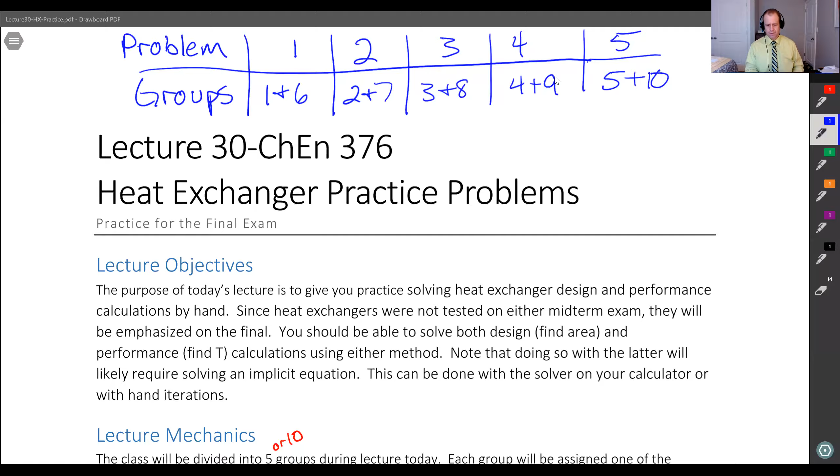George, I think you invited me into your group. Do you have a question? Oh yeah, I'd invited you when we weren't sure. Or is group 5 doing problem 5? Group 5 is doing problem 5, yes. Do you see my screen still? No. Okay. So I will broadcast a message to everyone, but you're doing 5. Yeah, problem 5. Okay, perfect.

I can't hear you on my end. I don't know if everyone can hear you.

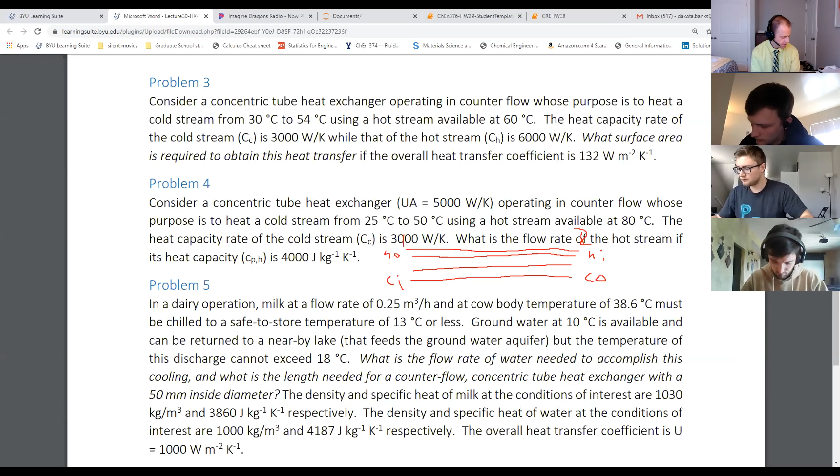So what we did is we solved for the total heat using the change in temperature. Yeah, m dot Cp delta T, good. And then we divided by UA and then used a solver to get the outlet temperature. Okay, what'd you get for the outlet temperature? That's what we think is suspect. We got 31. Not Kelvin, Celsius. 31 Celsius, yeah. Okay. I think you're okay then.

So I got 0.383, and we haven't talked amongst each other about why we have different answers. Okay, I'll let you guys talk through it then. I think you're okay up to your temperature, so that should be pretty easy to figure out.

Okay. All you smart people got an easy one. Yeah, seriously, it was dope. Okay, so I'm gonna go check on some other groups.

So Dakota, how did you get your 0.0006?

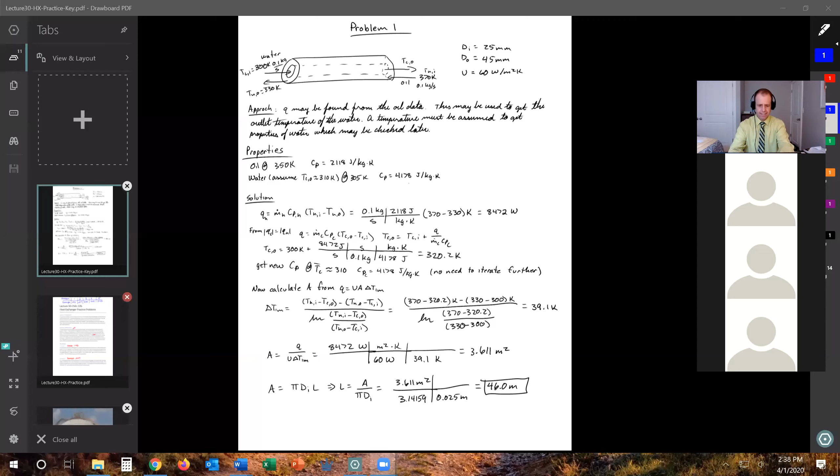Problem number 1. So let's just go over this. I want to talk through a couple things real quick. On this one, you know the inlet temperature of the cold and the 2 other temperatures. You also know both flow rates. And so you can get the other temperature fairly easily just using m dot cp delta T. That should almost always be kind of your first thing that you do on these problems, is just use the thermo equations to see if you can set all the temperatures.

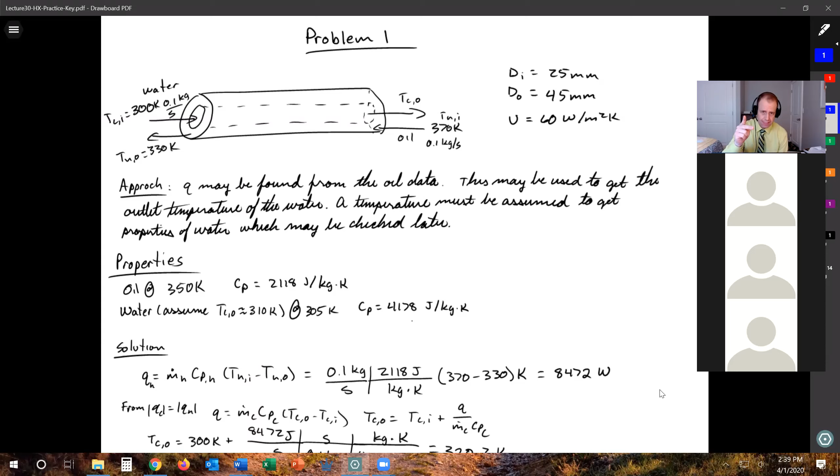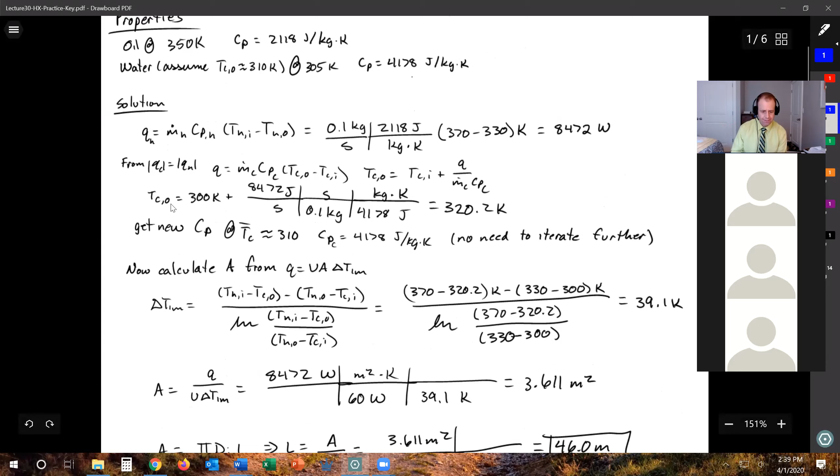That becomes problematic if you don't know a flow rate or if you don't know 2 of the temperatures, because then you've got to solve 2 equations, 2 unknowns. But the first thing you should do is use m dot cp delta T to get a new temperature. You see that I guessed something so that my T cold out was about 310. And I assumed water at 305, and the properties work out that you don't have to iterate much.

And on all these problems, if you haven't noticed, I don't make it so that you have to calculate h's. I've given you the U's, and I will do that. I will test whether you know U's, maybe on other problems, but I won't make you get a correlation on a hand-like problem. I would give you h's or something like that. At least that's how I think of it. That's how I've done it in the past.

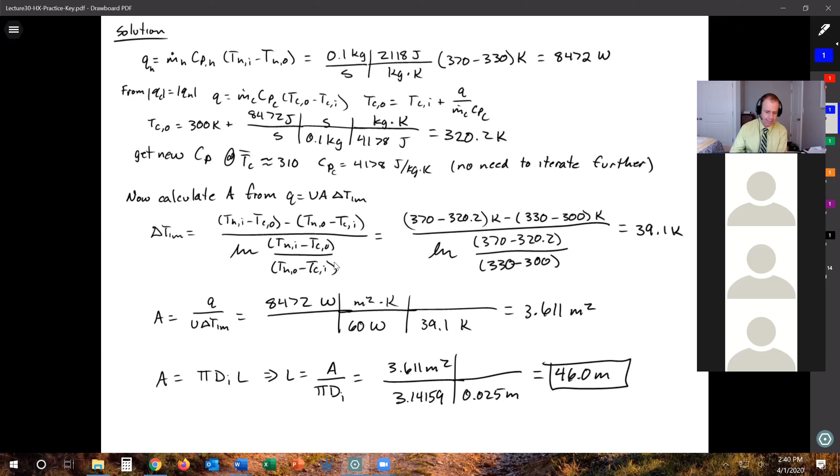But what makes these easy, right, is that you don't have to solve an h out or a U out. I give you those, and so area is separated out. There's no hard correlations that are dependent on L or the length. Where did you get the heat capacity of the oil? So I just looked in the back of the book. There's something called oil. It just says oil. And I just picked it up there. Okay. All the properties, if I give you a hand calculation like that, it's going to be in the back of the book.

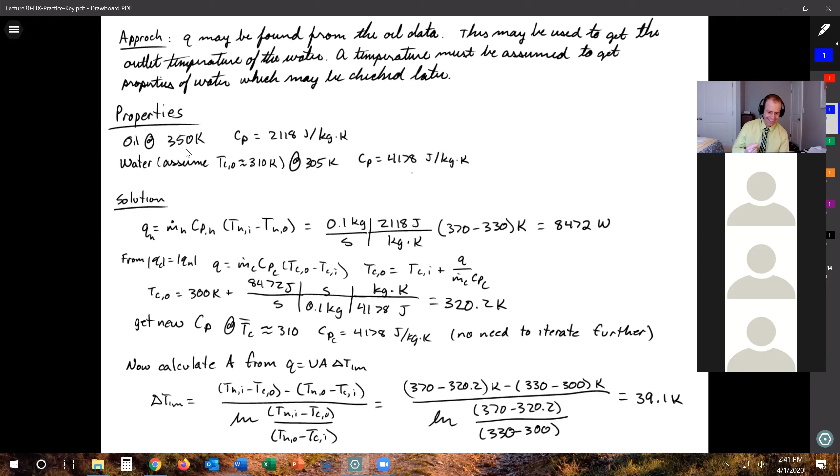I think there was something wrong with ours. Like, is that group 7? Yeah. We're pretty confident in group 2. Okay. Here's what we're going to do.

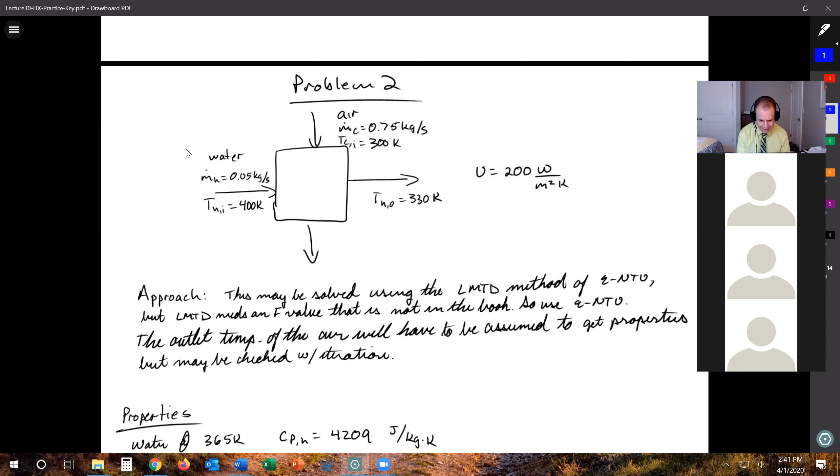So I give you inlet temperatures, and I also give you a U value. You don't have outlet temperatures here. Oh, you do have one outlet temperature, so you can get the other temperature fairly easily. So again, I kind of guess to get the heat capacities, I use Q equals m dot Cp delta T, and this is what I get for my other cold temperature. This one, I used epsilon NTU because to deal with delta T log mean and crossflow, you have to get an F value. The F values are not in your book, they're in the supplement of your book, so you could go get those. But it just seemed a little easier to do the epsilon NTU method.

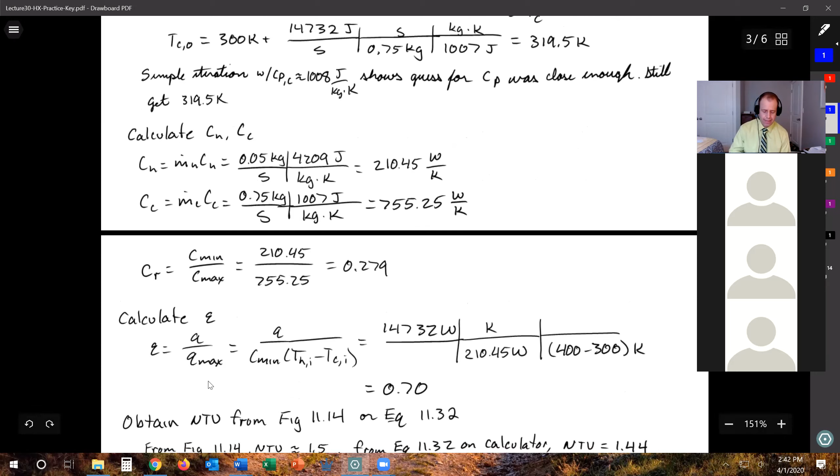And so you can calculate an epsilon because you know Q and Q max. I go then to figure 11.14, I get an epsilon of 0.7, use that to get an NTU of about 1.5. Or if you use the equation, you get 1.44, and you get about 1.5 or 1.6 meters squared. So I'll give that one to you. The point with this is if you have a complex geometry, the book has all of the charts in it already. I'm going to bring that up real quick in chapter 11.

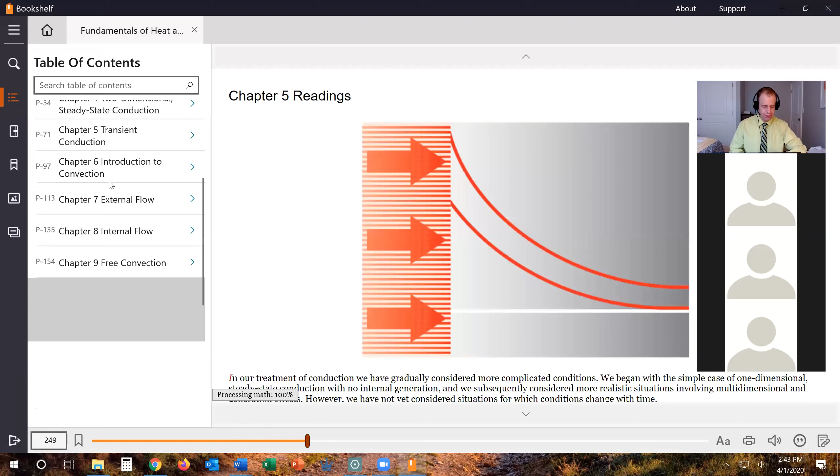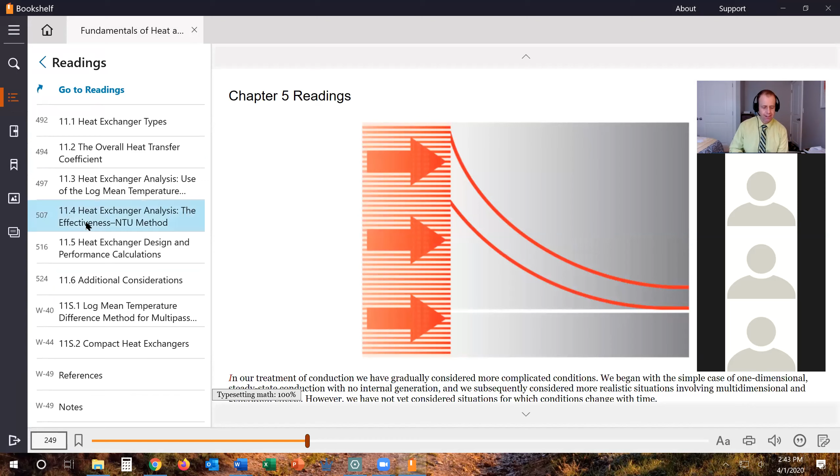You can use the equations, but if you're on a time crunch, like on a final exam, I'm going to be very liberal; I don't want you to have to iterate or do really complex equations like in tables 11.3 and 11.4. So let's just look here for a second in section 11.4, where it talks about the effectiveness NTU method. It's almost there.

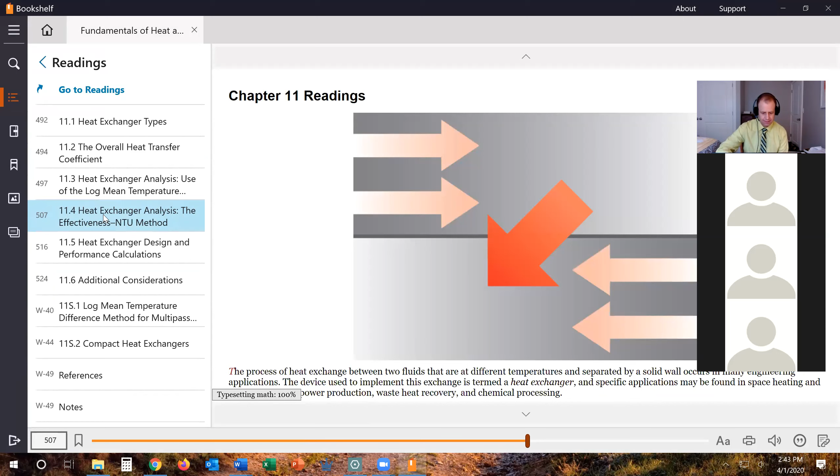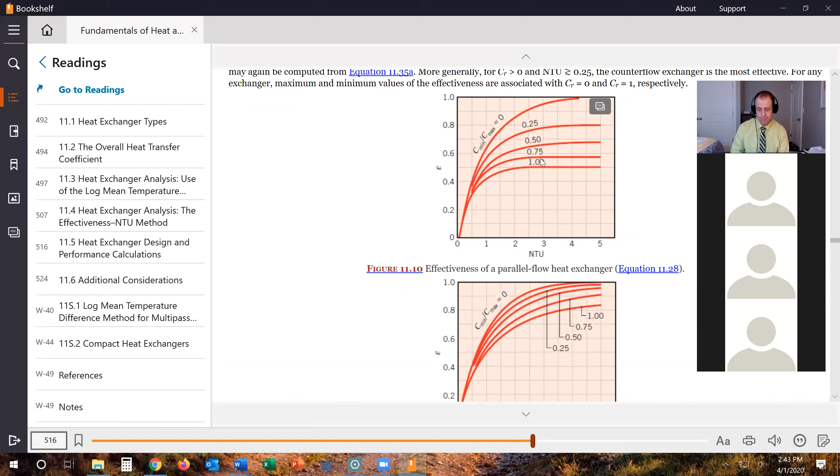There we go. So you can use these equations in table 11.3 and 11.4 to get epsilons or NTUs, but these same equations are in these tables right here. And in a time crunch situation, it would just be easier to pick off a table. So either you'll have an epsilon and a C min over C max, and you'll pick off an NTU, or you'll have an NTU and a C min over C max, and get an epsilon. And right here, you can see we have this cross flow, both streams unmixed. Figure 11.14. And so I just went to this chart, picked one off, and got it.

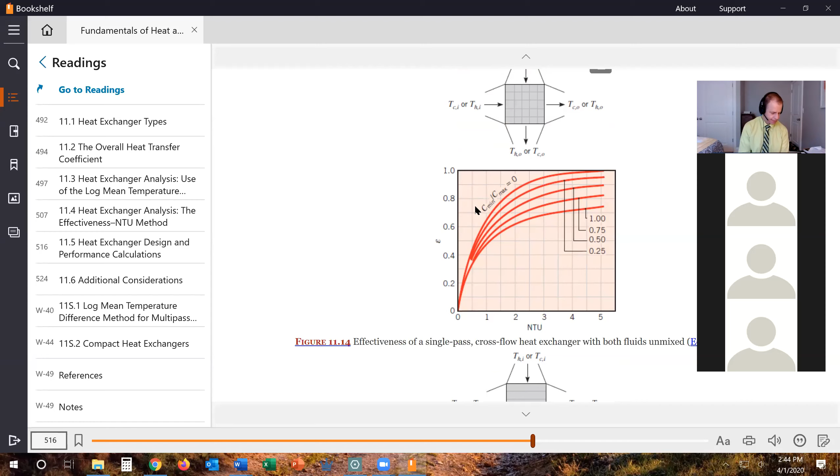But it's pretty easy to do the epsilon NTU method here because you don't really need to ever calculate the outlet temperature in this case. So I can estimate a C min and a C max, get the epsilon, go to the equation or go to the chart, get an NTU, and then solve for area. How did you guys do it? Did you use delta T log mean or did you use NTU? We used delta T log mean. Okay, so you can see that we're getting the same answers no matter what method you use.

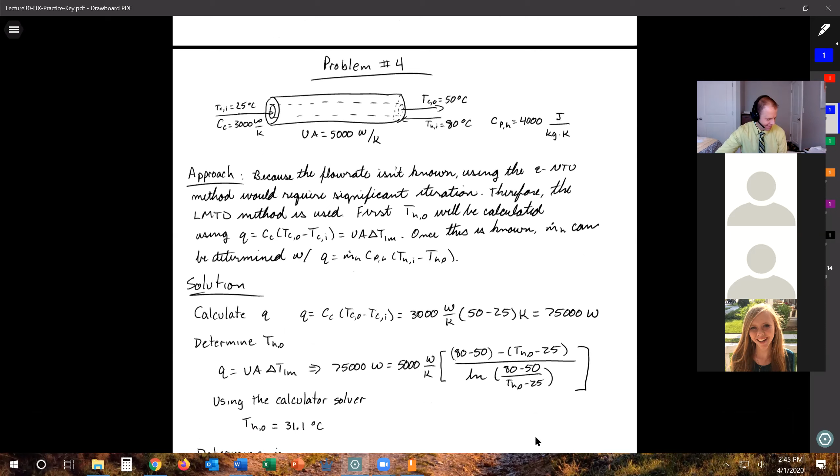Let's talk about this one for a second. I won't show you the answer just yet. Given 3 temperatures again, and you're given a UA in this case, and you need to calculate an M dot. M dot's one of the hardest things to calculate. If I was doing this on a homework, you'd have to do a huge F-solve block because almost everything's dependent on M dot. Now, it gets a little easier because I give you UA, so you don't have to use that M dot to get H's. But notice that anytime I give you UA, it gets a little easier.

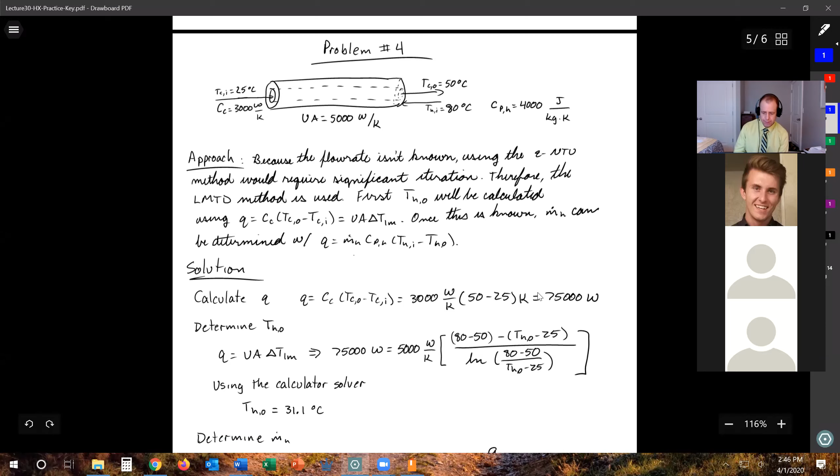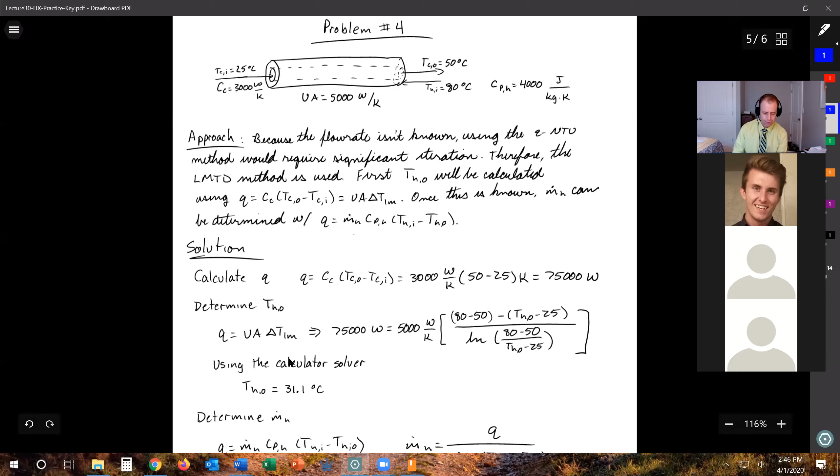So in this one, you can calculate Q using M dot Cp delta T. And then you could calculate an outlet temperature on the other side by using UA delta T log mean, or you could use Q's, or you could do a variety of things. Oh, you can't use Q as M dot Cp delta T because you don't know M. You had to use this or epsilon NTU. And this problem, one equation, one unknown, I threw it in my calculator and got 31.1. And then you can determine M dot. So I got 0.38. Way to be group 4. Good job.

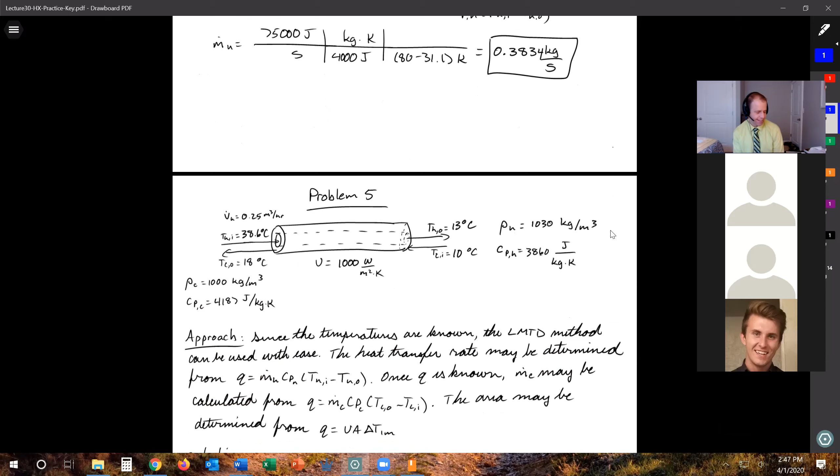And then let's do groups 5 and 10. Who wants to chime in and see if they got this one? Yeah, we got 0.211 kilograms per second and 4.93 meters. And group 10 got the same thing. Okay, that's what I got. So no homework today, but let's talk through this one more thing.

Here I give you all the outlet temperatures, and let's just use these last couple minutes to talk about, if you're doing this by hand, if you have all the temperatures, it's fairly easy to do delta T log mean, because I can calculate delta T log mean directly, and it usually means I'm looking for an area or a length or something like that, the geometry. If I don't have all the temperatures, it's usually easier to do epsilon NTU by hand. And you can go through these problems and see how that was done.

I give you little hints on this. I'll post this key, but I'm not going to post it until after. You need to post whatever homework you did, whatever work you did, take a picture of it, and post it to homework 30 as your assignment today. Anyone that wasn't in class today is going to have to do one of these by hand and then post it. Does that make sense for everyone?

So Dr. Knotts, my work for the one I did is kind of sporadic because it's more scratch work. Should I clean it up? Nope, we're not even going to grade them. I want you to post them right now, or within 10 minutes after class. Take a picture of this screen right here if you didn't write anything down and just post it.

I'll give everyone a second before I do that. It's kind of like an attendance. I just want you to do it for attendance. If you were here, I'm going to give you credit for it. And that's for homework 30, you said? Homework 30. You should just be able to post that one thing on Learning Suite.